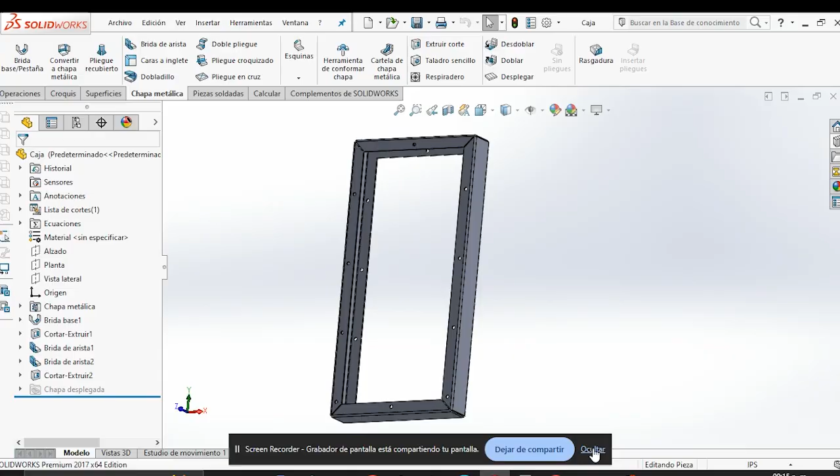Hello everybody. This time, let's make this part sheet metal. So let's start.

We create a new file. We accept this. Select this and draw. Escape.

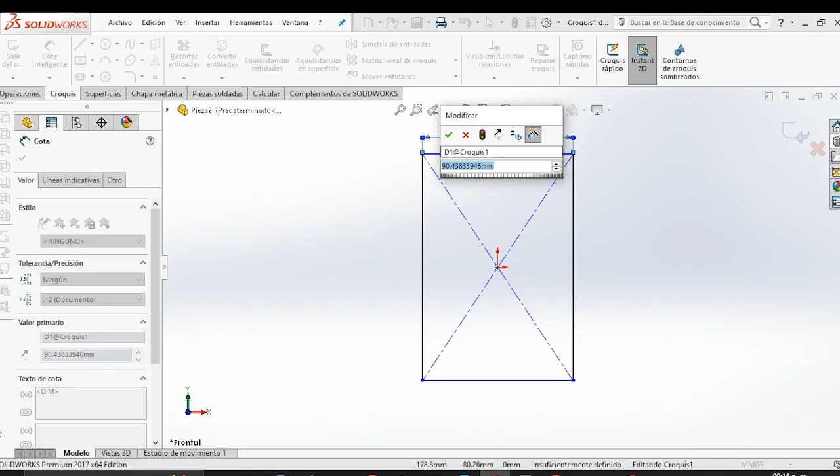The measure is 7 inches and 14 inches, and we draw another square.

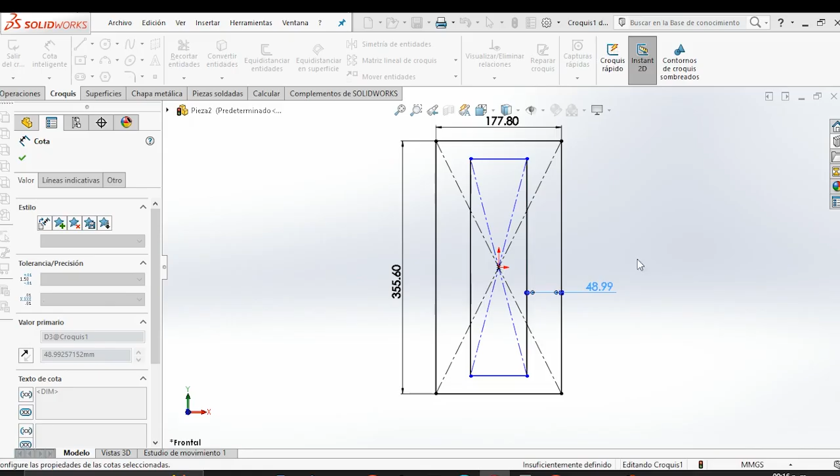We give dimensions. Here is 0.62 inches. Again, which is a sheet metal, and here is 0.06 inches.

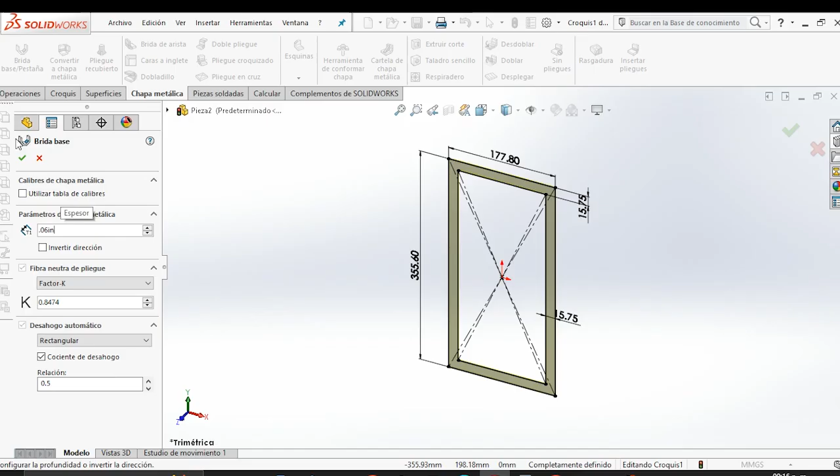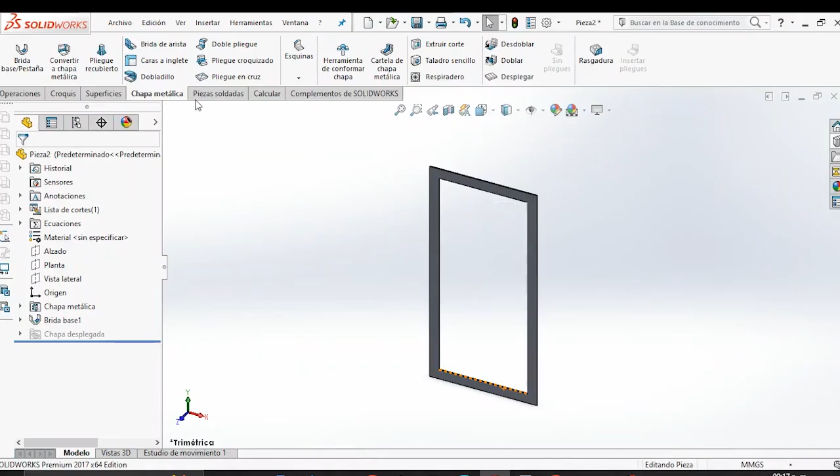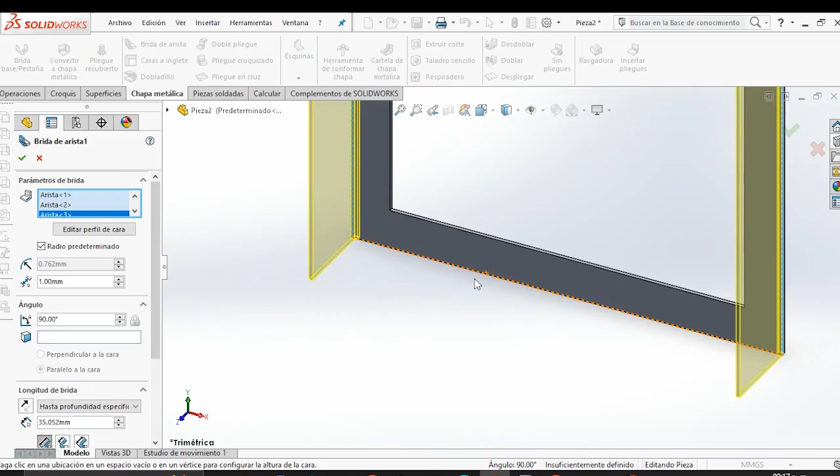Select this edge and this and this. Select OK. And let's continue.

Here is 0.62 inches. So 0.62 inches. Select this edge, 0.62 inch.

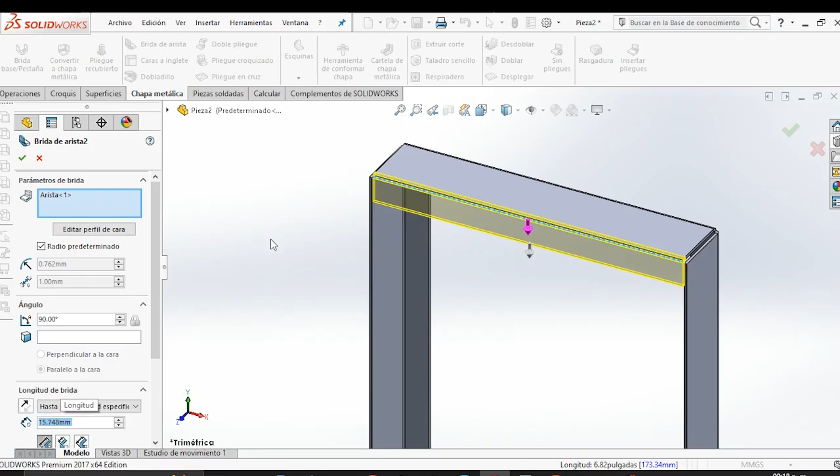Select this, here, and here. Press OK.

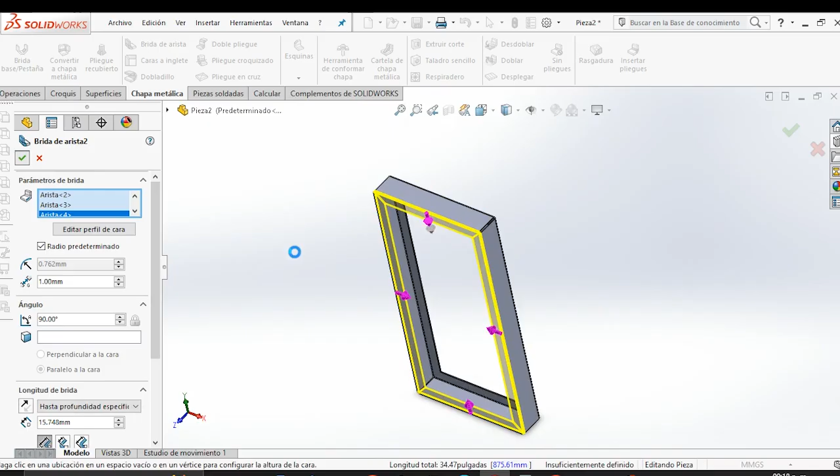Now let's make holes. Select this face, sketch, press key space, select this part and draw a line, construction line, escape.

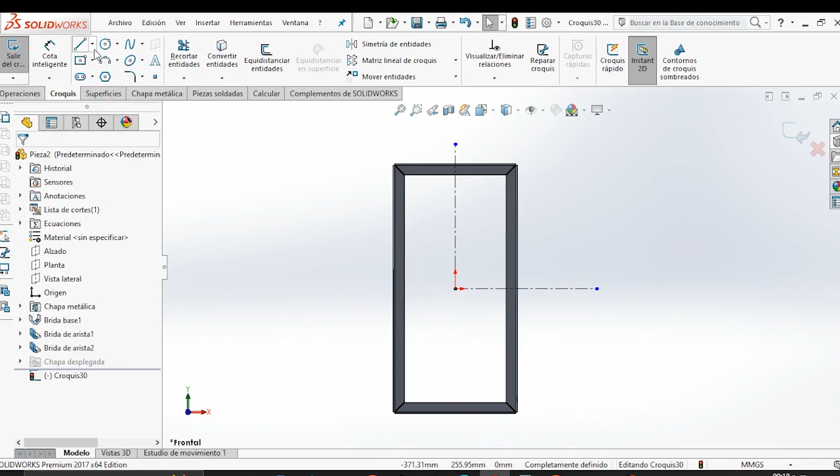Again, another line. Here is OK.

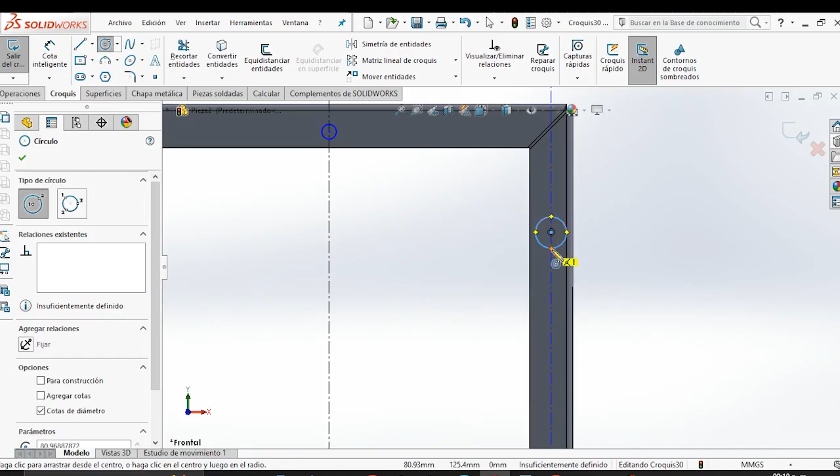Let's move and let's draw 5 circles like this, like this, and press the key escape.

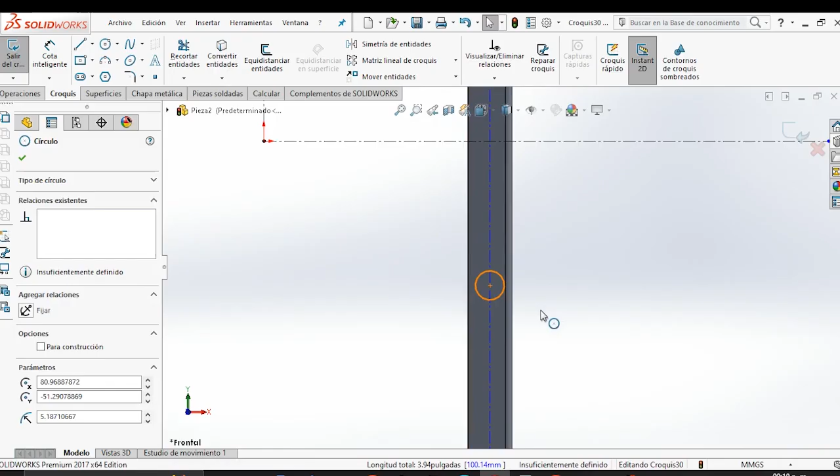Now these 5 circles we're going to make equal, so select this, press Ctrl and select. Here make equal, and we give measures.

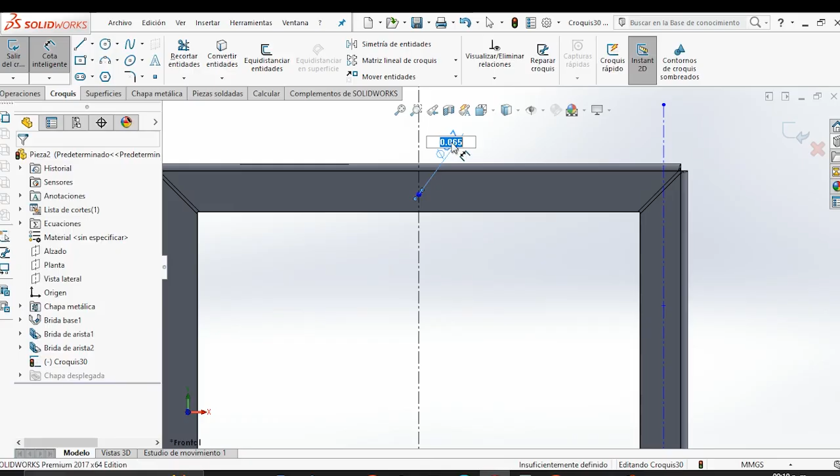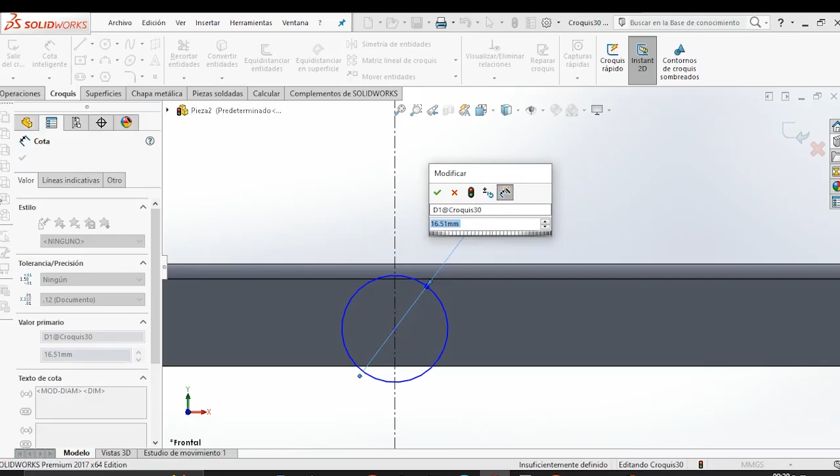Here is 0.065. Oh, sorry, inches. So it's too big. We give 7 millimeters.

That's fine. Now the distance here to here is, let's check, sorry, the diameter is 4.2, let's say 4.22.

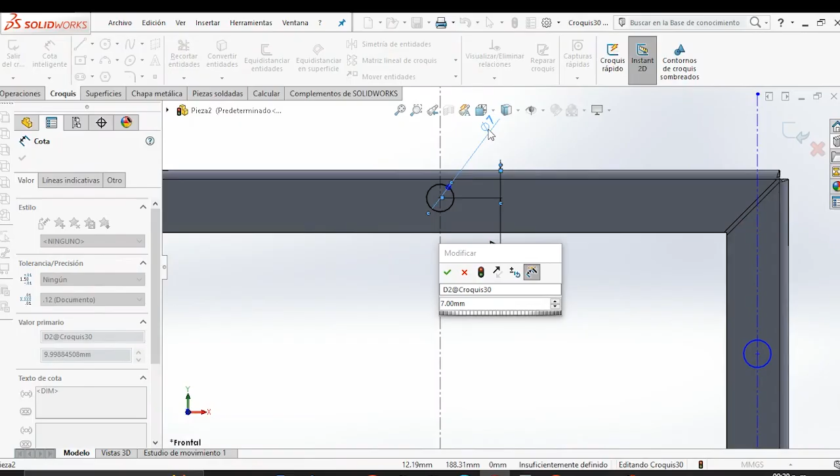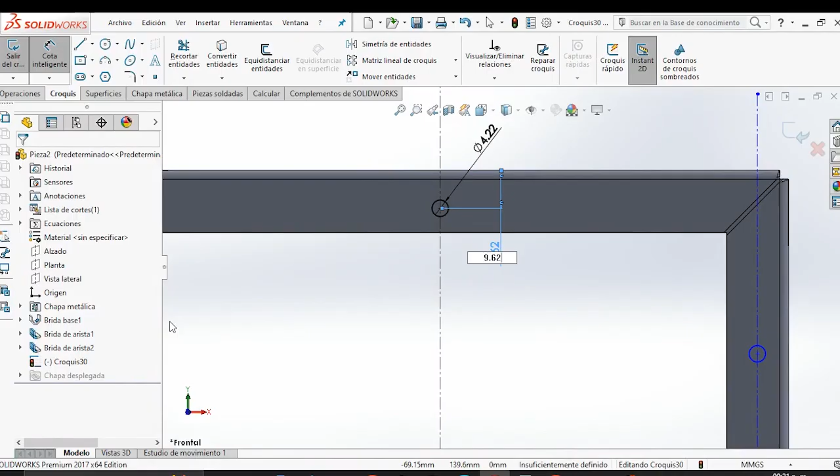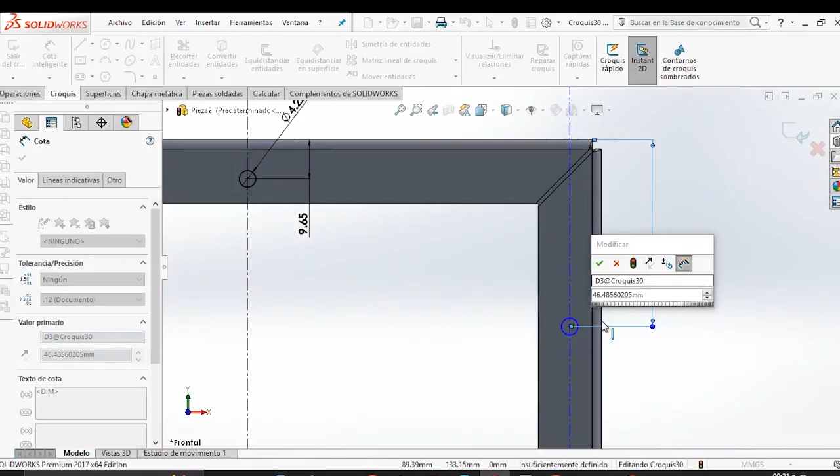Now the next distance, it's, sorry, 9.62. No, sorry, it's A5. It's 69.85.

And the next one, it's A4. It's 158.75.

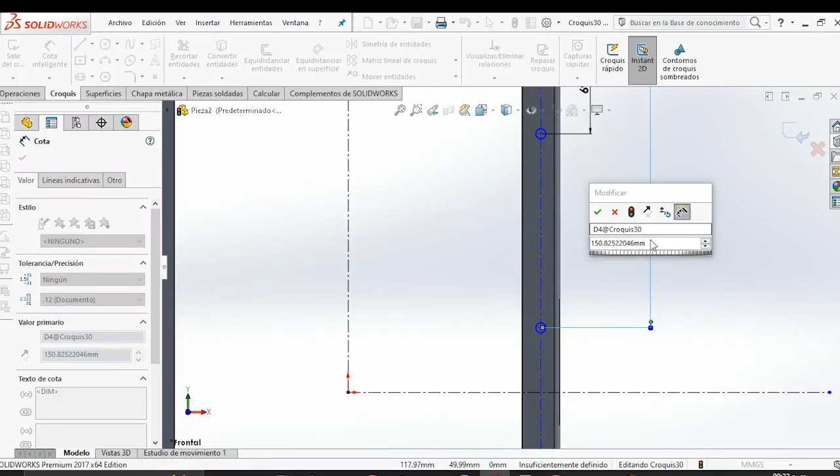Next, it's A3, 247.65.

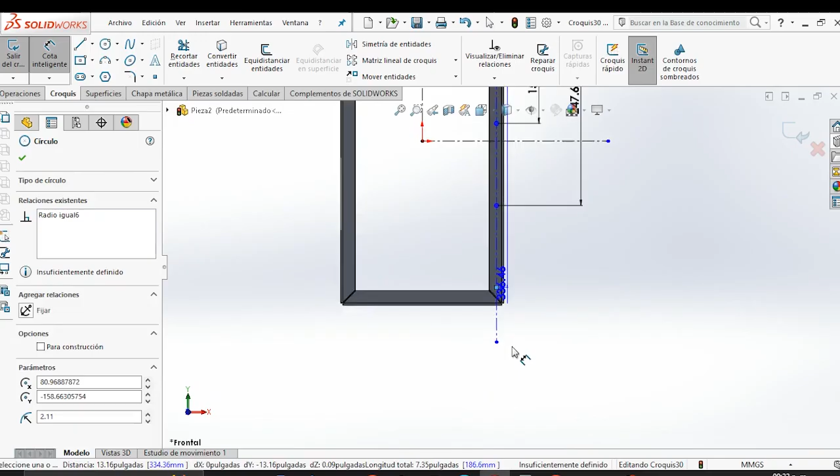And the last one, it's, sorry, A2, 336.55.

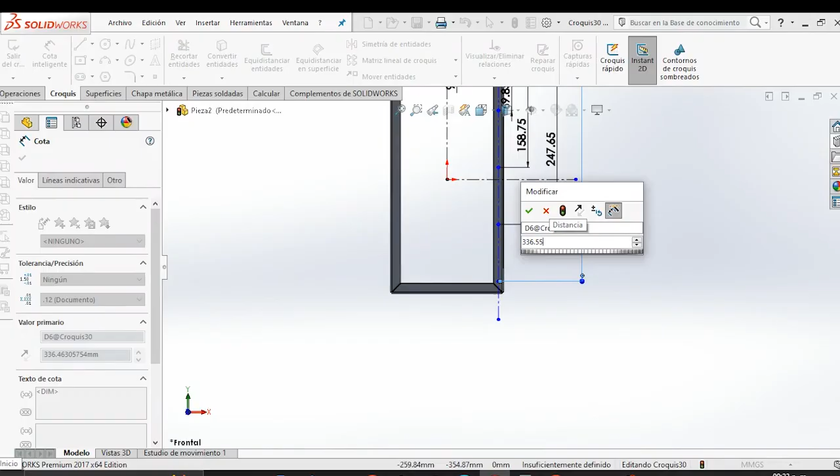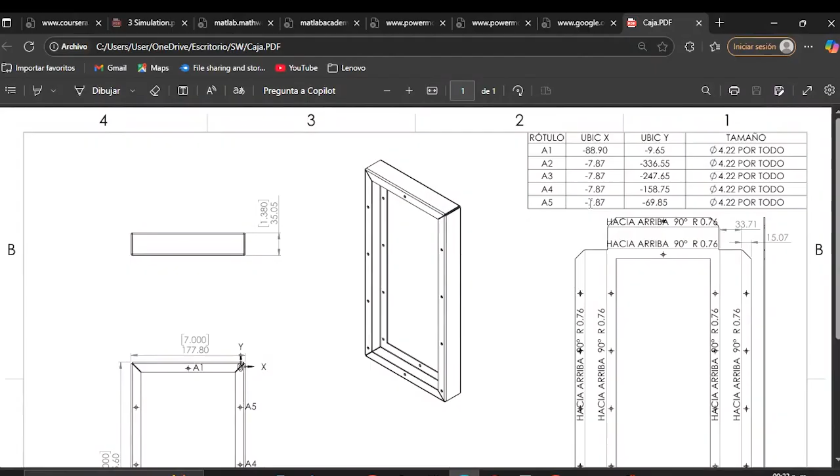The distance to this line, select this, delete here or here, it's 7.87.

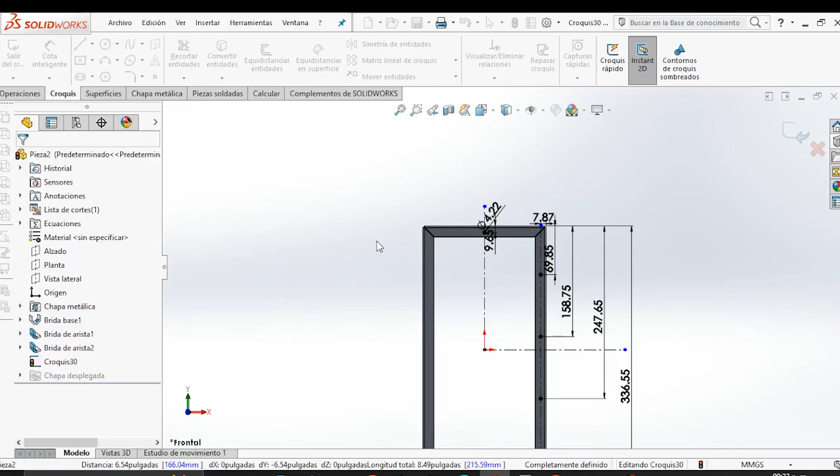That's it. We make a symmetry. Select this, respect this line, accept, again, symmetry.

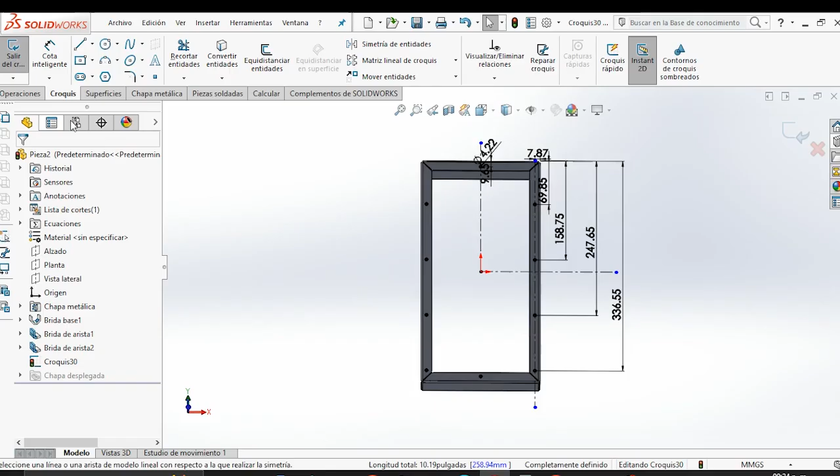Select this, this, this, and this, respect to this line. Now select sheet metal, cut, forward, accept.

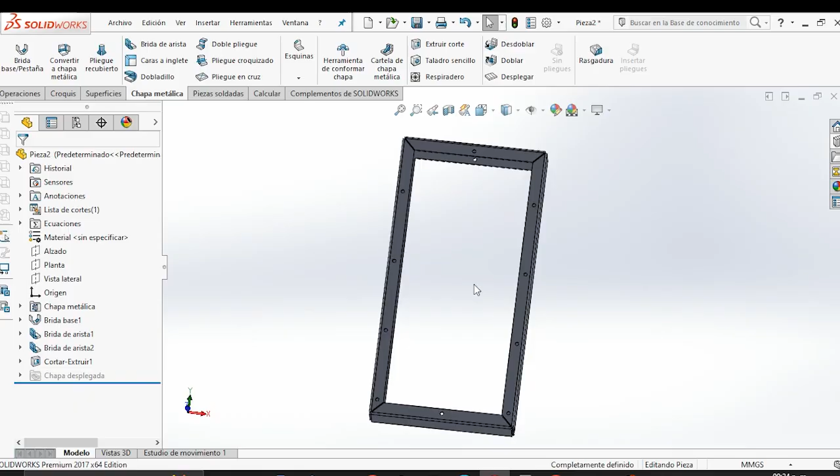We finished our part. It was easy. Just we need to learn to write blueprints.

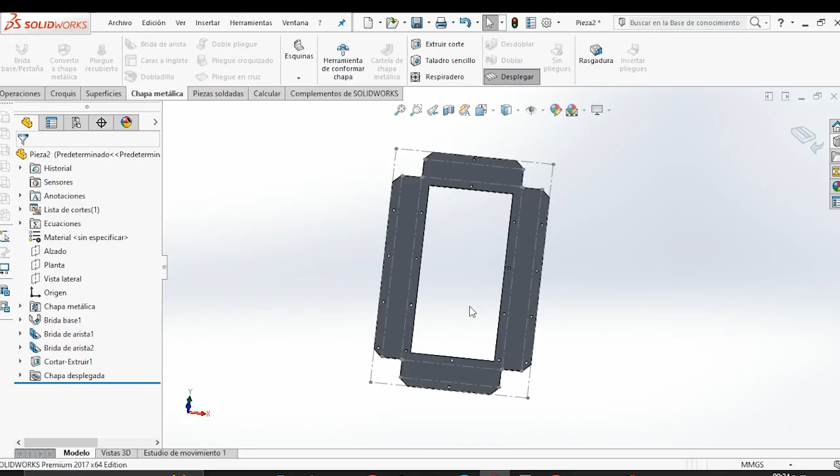So select this, and as you can see, here's the part of sheet metal that you must cut in some machine, for example a laser machine or plasma machine. So let's finish. See you.